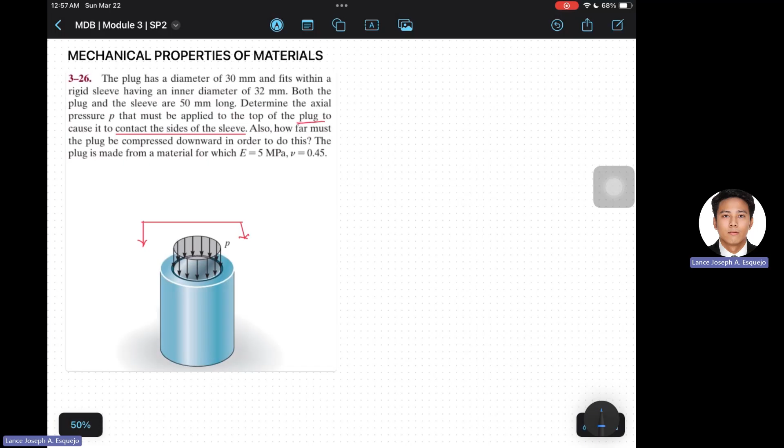We have the outer diameter of the sleeve, which is not provided. Then we have the inner diameter of the sleeve. And then exaggerate lang natin ng konti. We have here the diameter of the plug. So as provided, this diameter is 30 millimeters. And this one 32 millimeters. And then the length provided was 50 millimeters.

Now the plug, for it to contact the sides of the sleeve, this means na from the center, it has the radius of 15 millimeters, half ng 30. So sulat natin here, we have the initial radius na 15 millimeters. This is for the plug. And for it to contact the sides of the sleeve, kailangan yung kanyang final radius will be half ng diameter ng sleeve, that is 16 millimeters. So ibig sabihin, kapag naging 16 millimeters na yung radius ng plug, it will touch the sides of the sleeve.

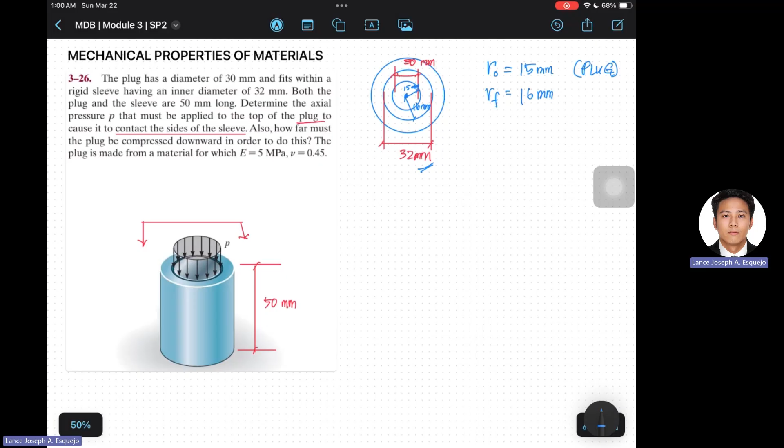Now we can determine the lateral strain, since we are talking about the lateral deformation of the plug. Here we have the change in length divided by the original length, or the final radius minus the original radius divided by the original radius. This is equal to 16 millimeters minus 15 millimeters divided by 15 millimeters. Then the lateral strain is equal to 0.06667 millimeters per millimeter.

Going back to the problem, we have the Poisson's ratio, 0.45. Recalling the formula, Poisson's ratio is equal to the negative ratio of the lateral strain divided by the longitudinal strain. Here we have the longitudinal strain equal to negative 0.06667 millimeters per millimeter divided by 0.45. Then the longitudinal strain is equal to negative 0.14816 millimeters per millimeter.

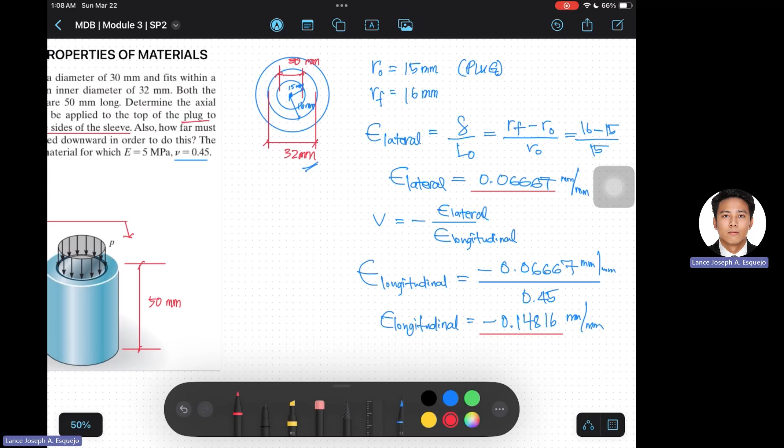So take note, for the lateral strain, we have a positive value. This means na nagkaroon ng increase or elongation. And for the longitudinal strain, we have a negative value. That means nagkaroon ng decrease or contraction. So as expected, yung other direction has a different sign.

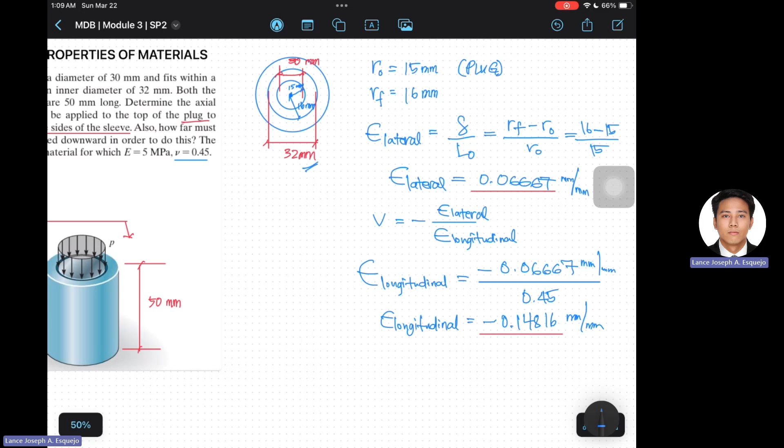Now that we have the longitudinal strain, we can compute the pressure P. Recall that stress is equal to the product of the modulus of elasticity and the corresponding strain. We have 5 megapascals multiplied by the computed strain, negative 0.14816 millimeters per millimeter. So sigma, which is the pressure P in this problem, is equal to negative 0.741 megapascal, or negative 741 kilopascals.

So what does the negative sign mean? Ang ibig lang sabihin ng negative sign is it is in compression. So we can just write P equal to 741 kilopascals in compression.

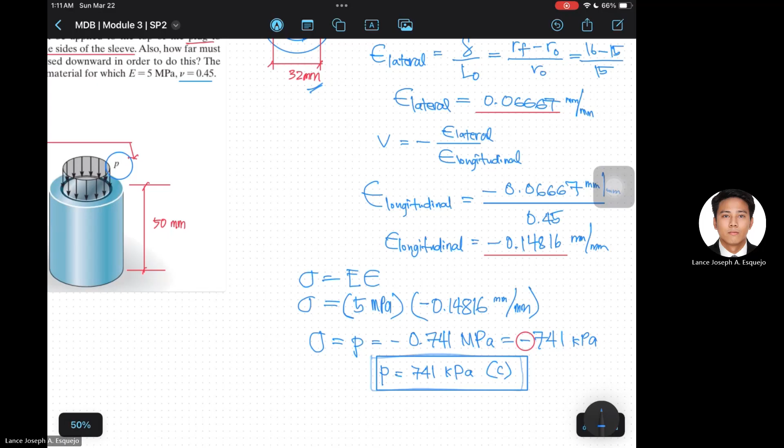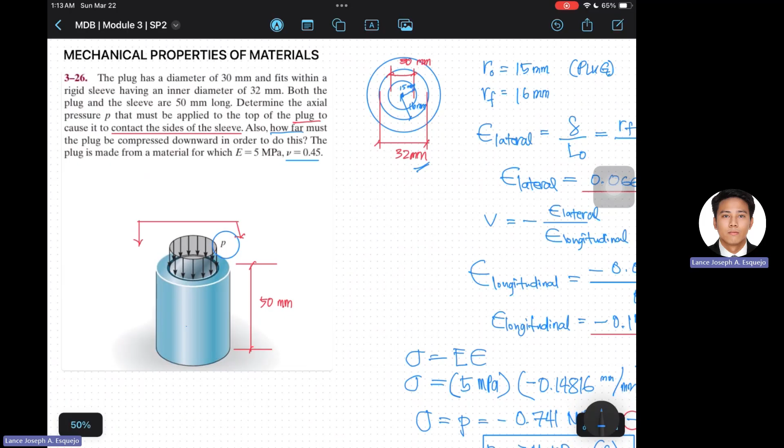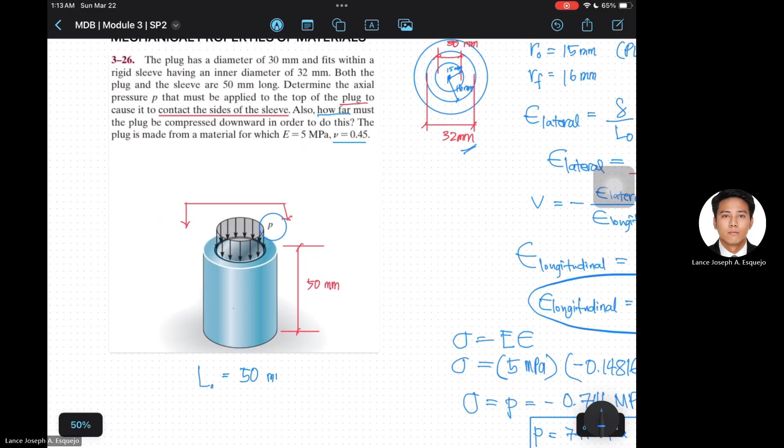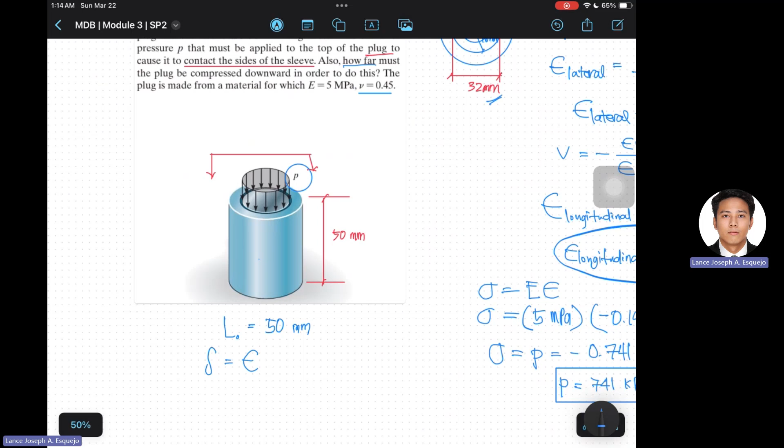Next question is, how far must the plug be compressed downward in order to do this? So ang keyword is how far. Therefore, we're talking about the deformation. Since na-compute na natin yung kanyang strain, mako-compute natin agad yung corresponding deformation, as long as we have the original length. As stated in the problem, the original length is 50 millimeters. The deformation is equal to the strain multiplied by the original length.

Substituting the values, we have negative 0.14816 millimeters per millimeter multiplied by 50 millimeters. Delta is equal to negative 7.408 millimeters. So what does the negative sign mean? You have to compress the plug for it to expand at dumikit doon sa sides of the sleeve. Because of this compression, magkakaroon ka din ng contraction. So as expected, yung ating delta should be negative.